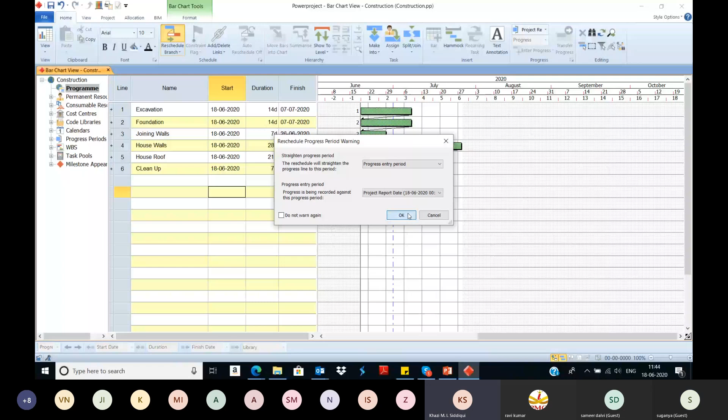Once you have given the relationships, you can go for the rescheduling. After giving the reschedule, all tasks are taking the finish to start relationships. Now I want to make this a summary task for all these tasks.

Created - construction of house. In the summary task, it will display the duration, start date, and finish date. So it has taken by default today's start date.

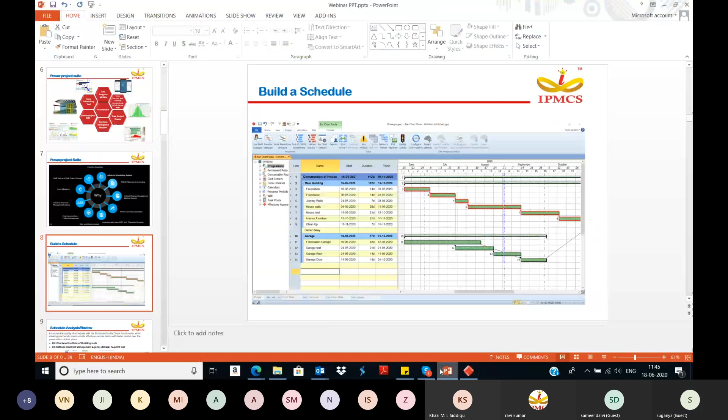The schedule has been built in Power Project. After building a schedule, we have to do the schedule analysis or review. So why do we need to do this? In order to cross-verify whether a schedule has been framed as per the logics and standards.

So based on which standard are we comparing whether our schedule is correct or not? We have two different methodologies: UK Chartered Institute of Building test, and US Defense Contract Management Agency DCMA 14-point test. In Power Project, these two tests are built in.

You can just run and check whether your schedule satisfies all the standards or not. You can see here in the diagram itself, and similarly we can check in Power Project.

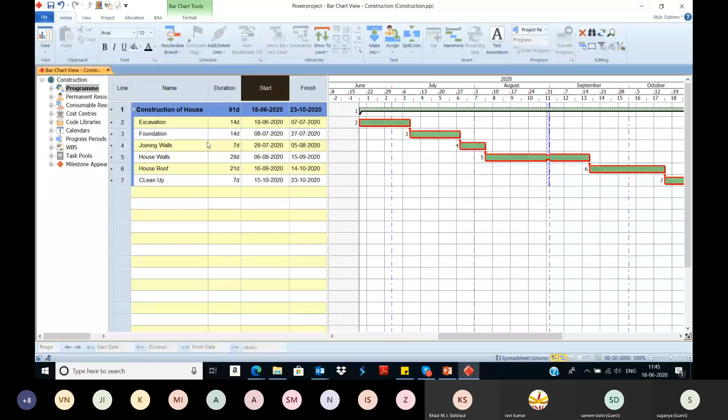You can go to the Project tab, here Quality Checks. You can choose which method you want. Right click, properties, select that you want to run for the whole project, then execute, so it will be generated.

Our schedule is proper in all ways, whereas other two things are like resources - we have not assigned any resources. It is just indicating this. So if you are doing resource management in real time, do it; otherwise, you don't need to do the resource management.

Also in a schedule, generally the predecessor and successor should be available for all tasks, whereas for the first activity the predecessor will not be available, and for the last activity the successor will not be available. This shows the closed network.

Also in a schedule, mixed relationships should be available, like finish-to-start or start-to-start together, whereas now I have used only finish-to-start, so it is indicating 66%. So in real time, you can check your schedule with this report.

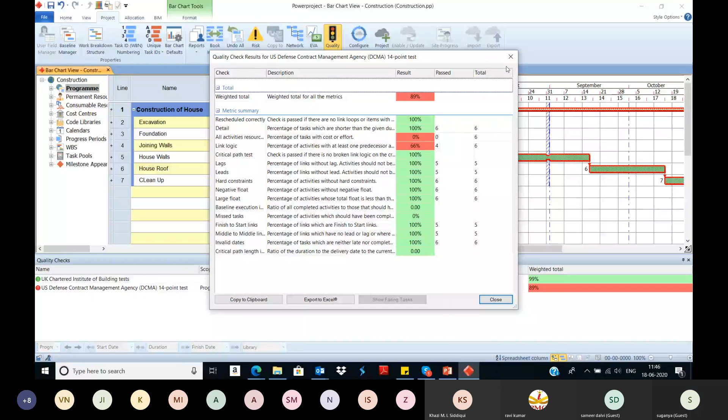After doing the schedule analysis or review, we'll move on to the baseline setup. Why do we need to do this? Once you frame the schedule, you send it to the client, and if the client agrees to complete the project in this much duration - the start and finish dates and cost - then you can freeze the plan for future comparison purposes.

So just go to Project, Baseline, New baseline, Finish. So the baseline has been displayed here.

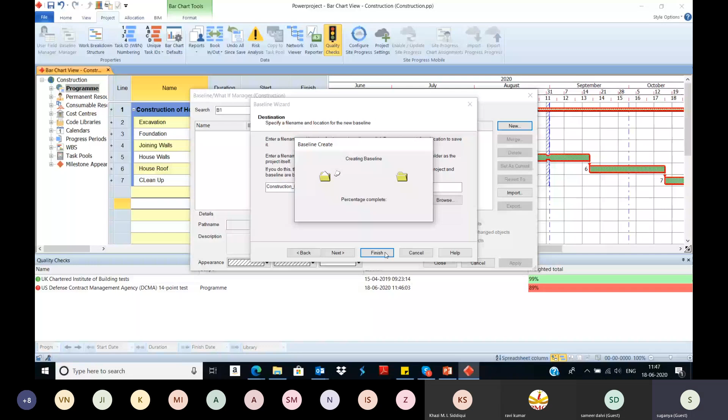After setting the baseline, the schedule has been frozen. We'll move on to the next step.

Overview of the delay analysis and its techniques. So what is a delay? Time during which some part of a construction project has remained incomplete or not performed as per contractual sections, key date, or completion date, due to unanticipated circumstances. So delays of activities which are on the critical path are the original delays which we are considering.

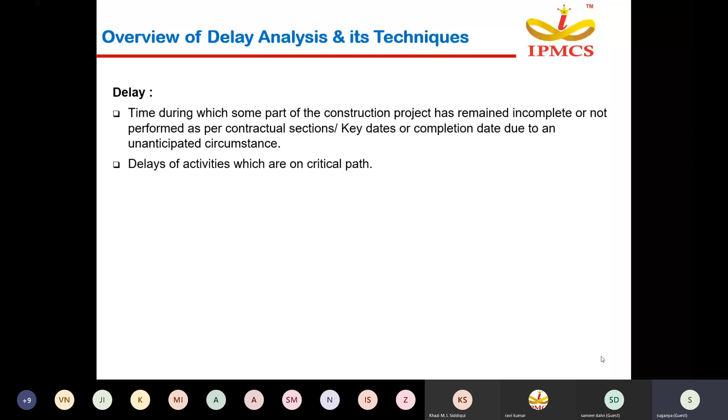Types of delays: there will be non-excusable delay, excusable delay, and concurrent delays. Under excusable, we have compensable and non-compensable delays.

So what is non-excusable delay? For non-excusable delay, there will not be any compensation in terms of cost or duration, whereas penalty charges are applicable for non-excusable delays. Some of the causes are defined here.

Difficulties in financing the project by the contractor, poor site management and supervision, ineffective planning and scheduling of the project, rework due to errors during construction, delays in subcontractor work, inadequate contractor experience, delay in site mobilization, delay in preparation of shop drawings and material samples.

So excusable delay types - we have two types: compensable and non-compensable. Compensable means in terms of time and cost - you can get cost compensation as well as extension of time. Whereas in non-compensable, you will not get cost compensation; only EOT is applicable for the non-compensable method.

So what is compensable? If an event within the owner's control could have been avoided by due care, the contractor is entitled to compensation for any loss suffered or expenses incurred. Whereas non-compensable: if the event is outside the owner's control, the contractor is not entitled to compensation for any loss suffered or expenses incurred - for example, force majeure, natural calamity, act of God, or judicial third party.

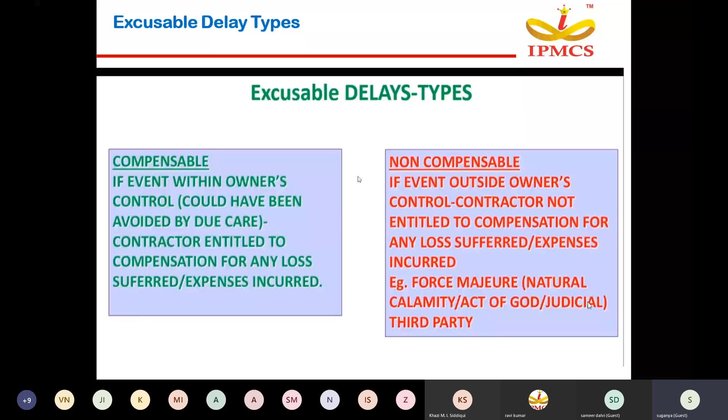Excusable compensable delays - some of the clauses for excusable compensable: slow decision making, suspension of work, late revisioning. These are all like from the client side if it happens - late in revising and approving design documents by the owner, delay to furnish and deliver the site to the contractor, delay in finance and payments of completed work by the owner, variation orders or changes of scope by the owner during construction.

Type of project, bidding and award, negotiation or lowest bidder, unrealistic contract duration forced by the client, ineffective delay penalties, owner interference.

Excusable non-compensable delay. Some clauses come under non-compensable delays: weather effect, hot, rain, etc., environmental restrictions, changes in government regulations and laws, slow permit by government or municipality, delay in performing final inspection and certification by a third party, lack of communication between the parties, fluctuation in cost or currency, force majeure such as war, revolution, riot, strike, and earthquake, etc.

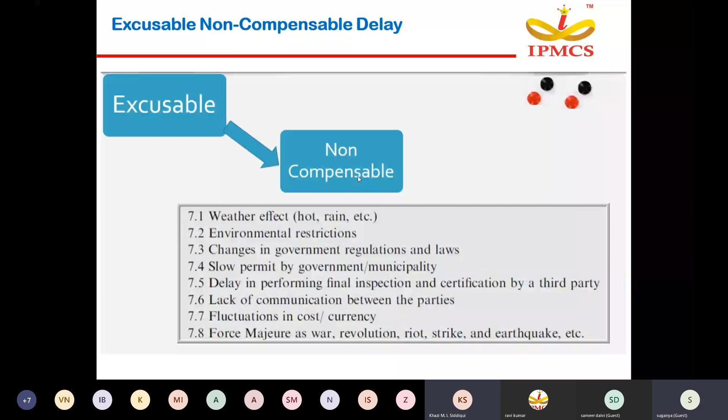The third method is concurrent delays. Concurrent delay is when excusable or non-excusable delays happen in parallel. Suppose two delays happen at the same time, that is called concurrent delay. For example, extreme weather is an excusable delay, while no resources is a non-excusable delay. Which one is feasible for us? We take the excusable delay duration and we can get compensation in terms of time and cost. So if concurrent delays happen, we ignore the non-excusable delay and take the excusable delay and highlight it to the client.

So how do we capture these delays in the schedule? For this, we follow one of the methods: time impact analysis or window analysis. Time impact analysis is a method used to determine the extent of impact from a potential delay in the construction process. The schedule analysis method involves the insertion or addition of activities indicating delays or changes into an updated schedule, representing progress up to the point when a delay event occurs, to determine the impact of those delay activities.

As discussed, this analysis applies to forecast the impact of potential delays in the project and the project's likely outcome. It involves insertion of delay activities indicating delays or changes in a schedule, representing progress up to the point when a delay event occurred. It helps promote negotiation and later agreements on delay claims. It is the best technique to determine the amount of extension of time that the contractor should have been granted at the time an excusable risk occurred. The final result of the time impact analysis must be presented shortly after completion by the contractor to avoid an additional EOT claim or construction acceleration.

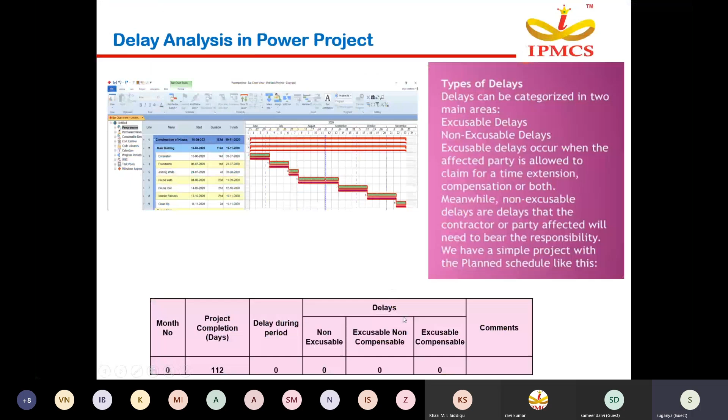So now you can check, 112 days duration is there, start and finish is there. In the slide you can see we have delayed 21 days on excavation due to unforeseen site condition. So initially this is our project, 112 days duration, whereas when we start updating in the first month, we are going to update our project on a monthly basis.

So in the initial stage itself, we agree with the client on which frequency we are going to update our project - monthly, weekly, fortnightly, or daily basis. Right now I have taken monthly basis updation. So at the end of the first month, whatever happened at the site, we have collected the information, and after collecting that I got to know there's a 21 day delay on excavation due to unforeseen site condition.

You can see here, 21 days unforeseen site condition delay activity is there. So I have to capture this delay activity in the schedule, then update the excavation. So now, go to Power Project.

Before starting the first activity itself, the first delay activity has occurred. So what you have to do to capture the delays is simply not change the activities - first capture the delay activities in the software. So, unforeseen site condition, 21 days duration.

After giving this, just link it. After completing this unforeseen site condition delay activity only, the excavation activity has been started. Just link it now.

Reschedule it. Also, when creating the activity, you can summarize and create it as a summary activity. So the unforeseen site condition is from the owner delay only, either owner delay or contractor delay.

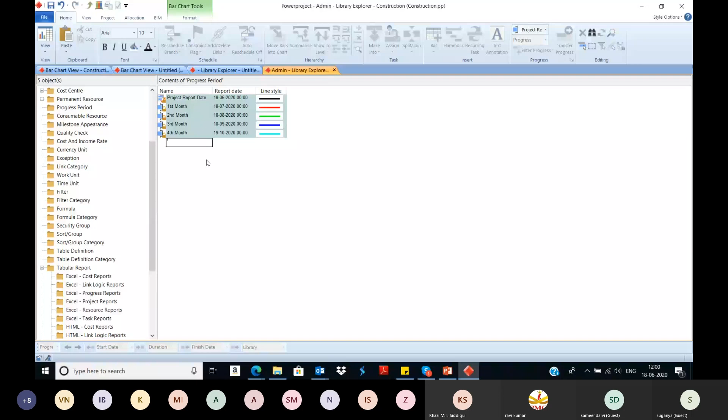Similarly, you can create third month, 18/9. Similarly, fourth month, 18/10. So I have created till the fourth month.

So now come to the project. Once you add the delay activity, now you can enter the actuals. So unforeseen site condition - I'm summarizing, putting this as the owner delay. Now you select the activity, right click in the bar chart itself, and go to enter progress.

You can choose the progress period. At the end of first month, this is 100% completed. And this activity, suppose this is completing on 16/7, means this activity will be starting on 17/7.

At the end of first month, .14 will be the percentage completion. Just enter and close it.

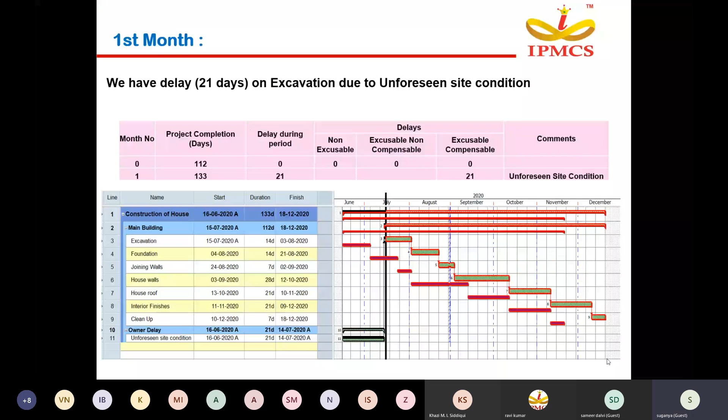So again we'll move on to the next month. First month, 21 days delay has been captured. Again in the second month, we have no delays. Just go to the project and update without delay in the second month.

You can select second month. Now you can select the next activity, enter progress for second month. So till this we have completed. Now again reschedule it for the second month. So second month has been rescheduled.

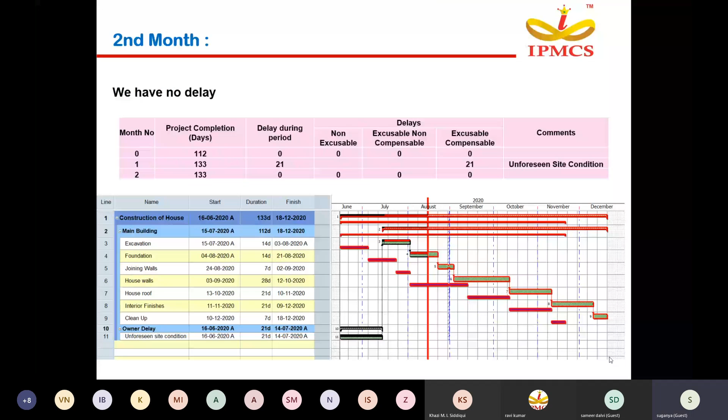Next, on third month, we have two different delays - one is owner delay and another is contractor delay. How you can capture this? So owner delay we have 14 days and then contractor delay we have 21 days.

So the subcontractor left the job. In this case, both are concurrent delays, two delays happening simultaneously. So what we will do - two delays happening simultaneously means 21 days, 14 days. So 14 days will come under the owner side, and the remaining 7 days only chargeable for the subcontractor, that is non-excusable. Let's see how to capture this.

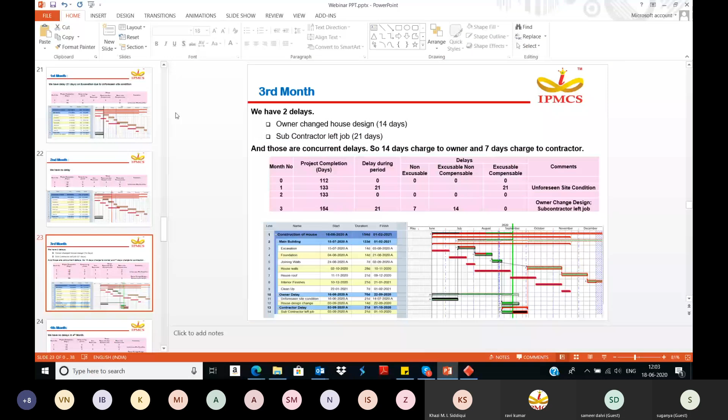So here you can add design change by owner - this activity will come under owner delay, so this is 14 days. Select this activity.

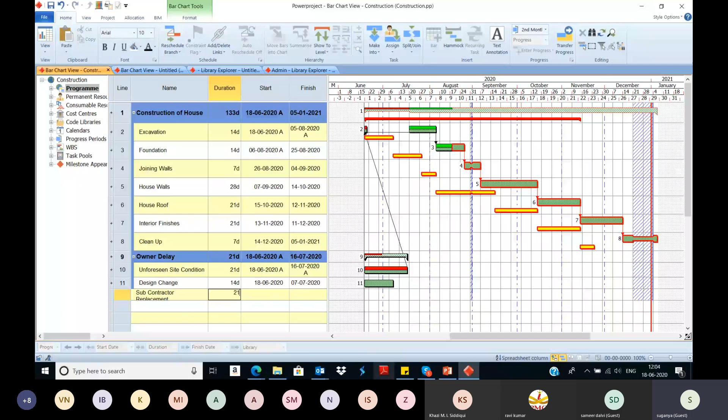Then again you can create one more - subcontractor left job, subcontractor replacement - this will come under 21 days. So now this activity will be added as a separate WBS, that is like contractor delay. You can summarize it and add it as a contractor delay.

So next you have to give the relationships, since these two are running parallelly - start to start.

Then you can see here - after the third activity completes, these two are starting. So give the relationships like that. Then after completing this one only, this activity is starting. So just give the reschedule.

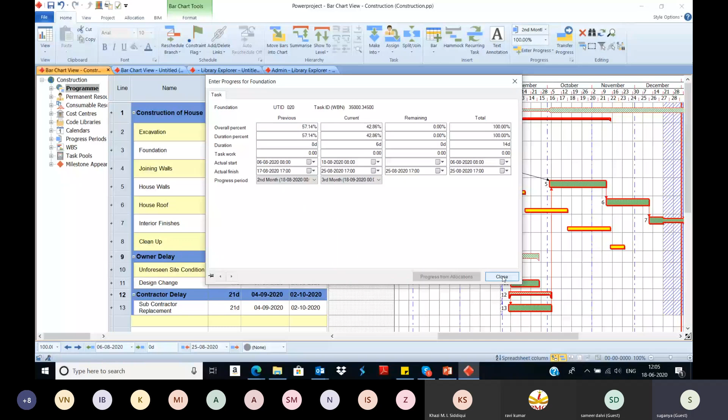So now you can start updating this. Select this, right click, enter progress up to third month. Next activity has also completed up to third month. Then these activities also you can give the completion - up to third month, these delays has occurred.

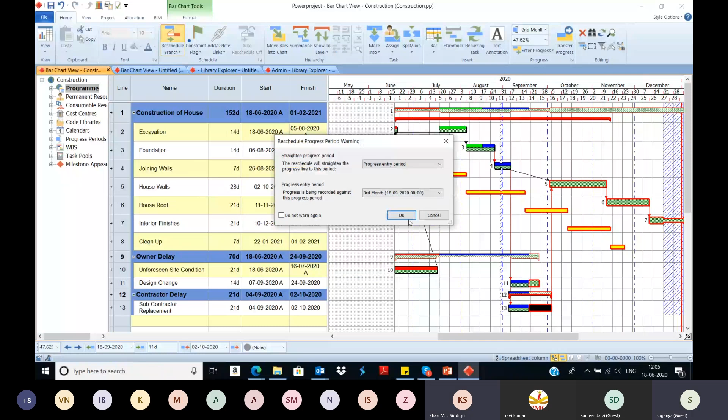So now you can reschedule it. After rescheduling, it has been changed to 152 days.

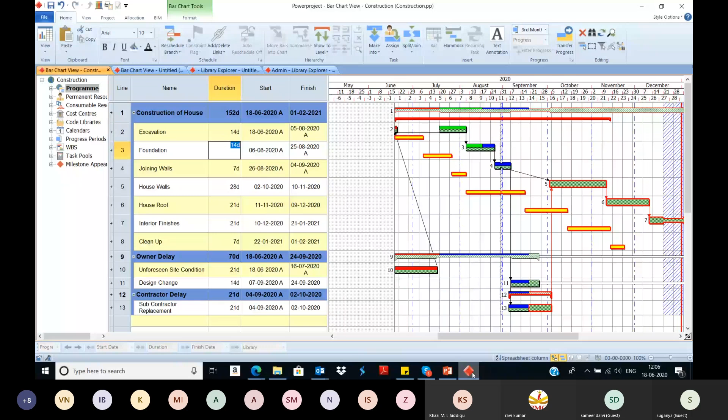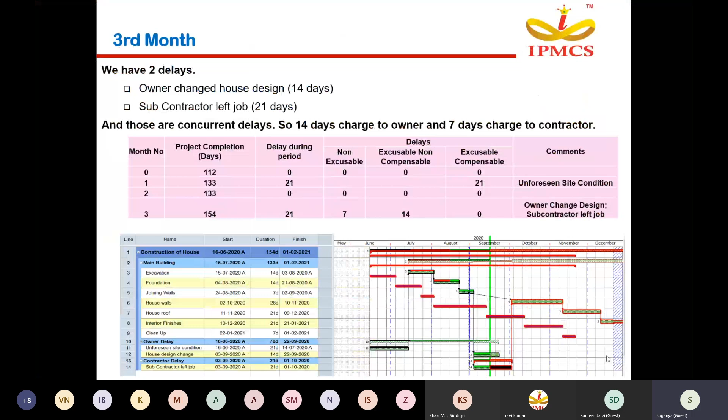Similarly, at the end of the third month we have 154 days. Then at the end of the fourth month, there are no delays. And at the end of the fifth, sixth, and seventh months, there are no delays.

Right now, whenever we are entering the delays, at the end of the first month we have entered 21 days, which is from the owner side, unforeseen site condition. Then in the third month, we have two delays: one is owner change design, and another is subcontractor left job.

The owner change design comes under excusable and non-compensable, where you cannot get any compensation, but you can get extension of time. Whereas subcontractor leaving, only 7 days will go as non-excusable.

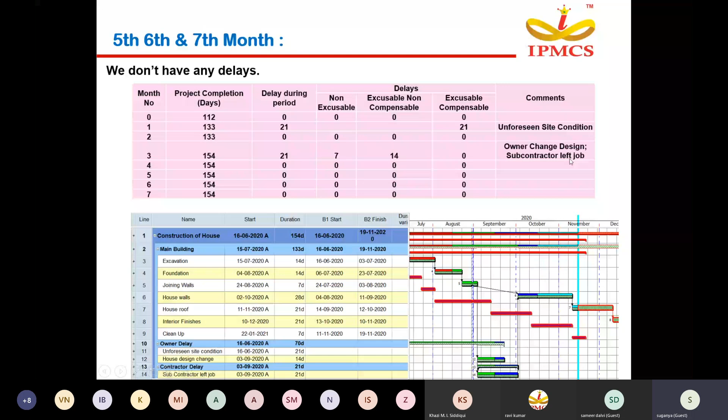Let's see the analysis of the project completion date. Overall, initially we planned to complete in 112 days, but it has been delayed by 21 days, making the project completion 133 days. Then again, 21 more days, making it 154 days total.

So if you take the total delay, it will be 42 days, whereas non-excusable is 7 days. In these 7 days, you will not get any time extension or compensation; instead you will be under penalty charge. Whereas excusable non-compensable is 14 days, for which you will get 14 days extension of time.

In excusable compensable, 21 days, you can get both extension of time and compensation. So you can see 21 days for time and cost, and 14 days for time only.

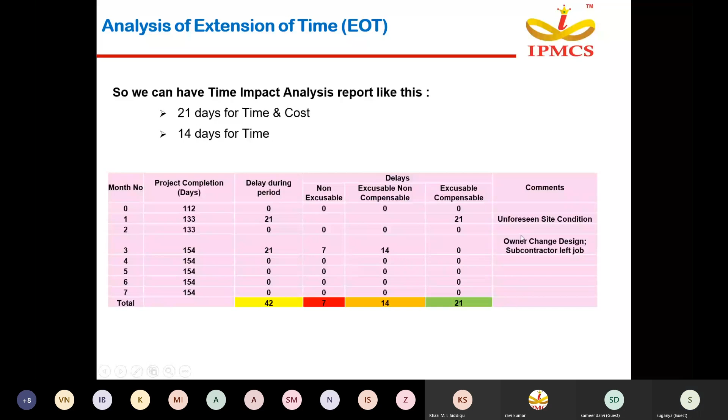This is how you get 154 days, and the duration variance and finish variance can be displayed here. Now the new start and finish dates have been generated. Initially, the baseline start is 16/6 and finish is 19/11, whereas now the current finish will be 2021, February 1st.

Now you can produce this as an extension of time schedule, or recovery schedule, to the client. In the recovery schedule, whatever delay happened, and the realistic, achievable plan, we produce it in the schedule and send it to the client to get the extension of time and compensation.

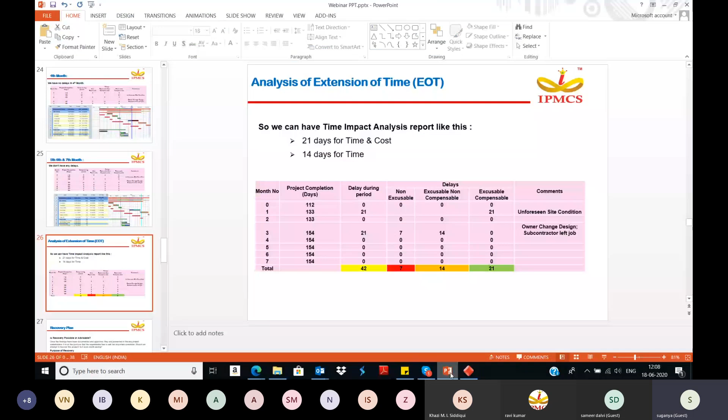Also, for the recovery plan, first we have to check in the schedule whether recovery is possible or advisable. Once the findings have been documented and approved, they are presented to the key project stakeholders.

At this point, the organization has to ask two important questions: Should we attempt to recover this project? Is it even worth saving?

The purpose of recovery is that the main goals are producing an achievable schedule, re-baselining the project plan, re-establishing customer and management confidence, sorting out project problems, and rebuilding the original project team.

Now we have gotten some extension of time, so a different finish date has been defined. After getting the different finish date, as a planning engineer or project manager, you can try different practices like schedule compression and fast tracking methods.

Still, if you want to compress the schedule, check whether it is achievable or not. If it is achievable, send it to the client and get approval.

So we have seen till now how to capture the delays and how to capture the recovery plans and extension of times in the Powerproject software. Hope everyone is clear. Now we'll see the other features of Powerproject.

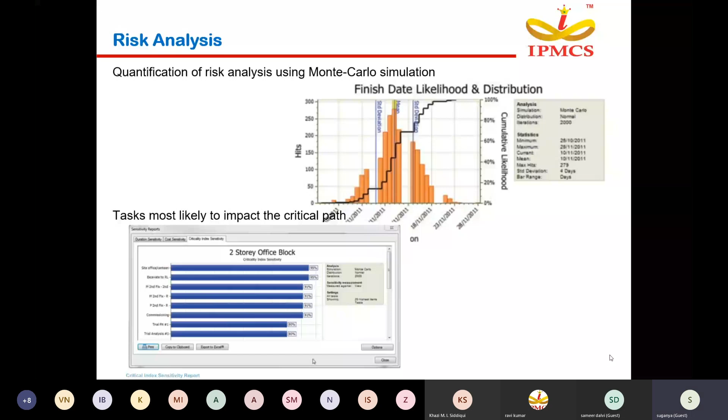Other features of Powerproject, like risk analysis. Inbuilt risk analysis is available in the Powerproject software. You can check what will be the extended finish date, and likelihood finish dates can be checked here.

You can go to the Project tab, go to Risk Analysis, and there you have an option called Schedule Check. The rescheduled report can be generated from the risk analysis itself. In your schedule, any constraints applied, any activity without a link, any open-ended activities, any out-of-sequence activities — all this information can be generated from schedule check, that is, the rescheduled report.

So number of tasks rescheduled, number of logical links, not started activities, started and completed activities — all this information can be generated from the rescheduled report. Also how many critical activities, which is the longest path, any deadlines, any open-ended activities.

Also, now you can run the risk analysis. I'm going to run the risk for all the projects, with the distribution setting as triangular, and you have two different sampling methods like Monte Carlo simulation and Latin hypercube. Whichever random sampling method you want, you can take. Now go to the task result and select generate.

So now we can get some finish date, like 1st February, I can complete from the schedule. But after you run the risk analysis, it is generating, there is 10% chance to complete the project on 28th January itself, but 100% chance to complete at the maximum 5th February 2021. So this is the advantage of the risk analysis.

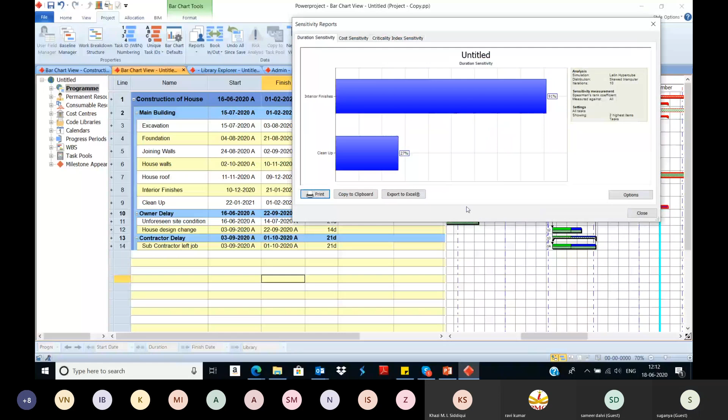So this risk report can be generated either in terms of sensitivity report or likelihood distribution. Go to sensitivity, graphical report can be generated, or the distribution method can be generated. So here it will show what are the chances to complete the project at the minimum 28th January, maximum 5th February, most likely to complete on 1st February.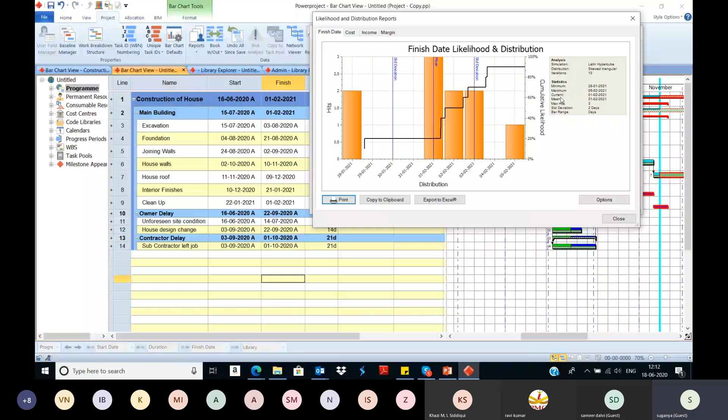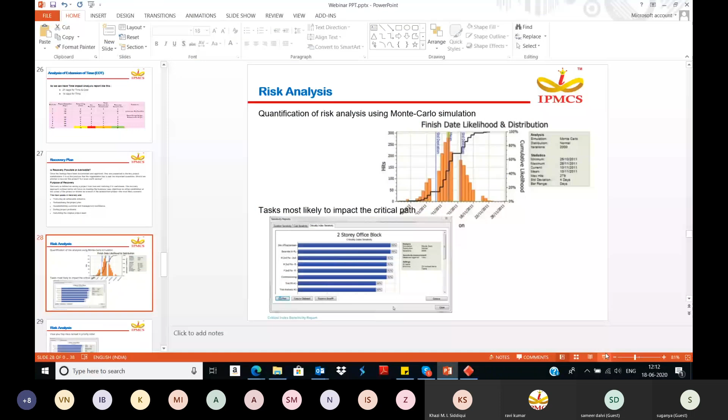So these are extra features of our project. Inbuilt, you can run the risk analysis. Reschedule report we have seen.

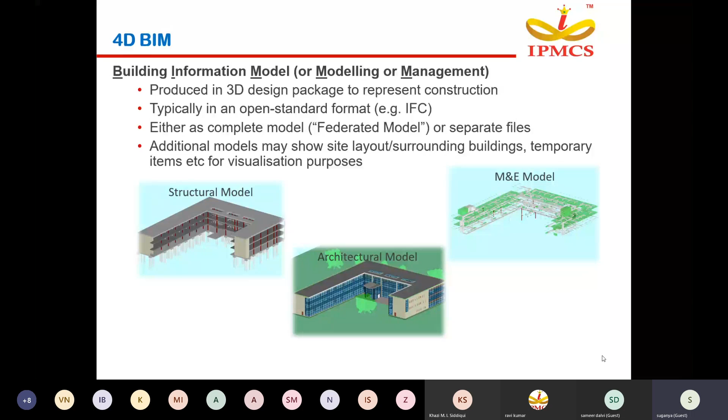So next, 4D BIM. In Power Project, you can access the 4D scheduling also. 4D BIM, Building Information Model or Modeling or Management, produced in a 3D design package to represent the construction activities, typically in an open standard format, IFC, either as a complete model or separate files. So additional models may show site layout or surrounding buildings, temporary items, etc. for visualization purposes. So in Power Project, you can bring the 3D models into Power Project, and then you can integrate the 3D model and the schedule to do the visualization, like 4D scheduling here.

The model simulation is possible in Power Project. Once you link the model and the activities, once you run the simulation, visual representation can be seen here on this particular date from the bar chart and the 3D model. On this particular date, which activity needs to start on site, whether it has been started or not. So you can capture the delay analysis in the model also in the visual representation.

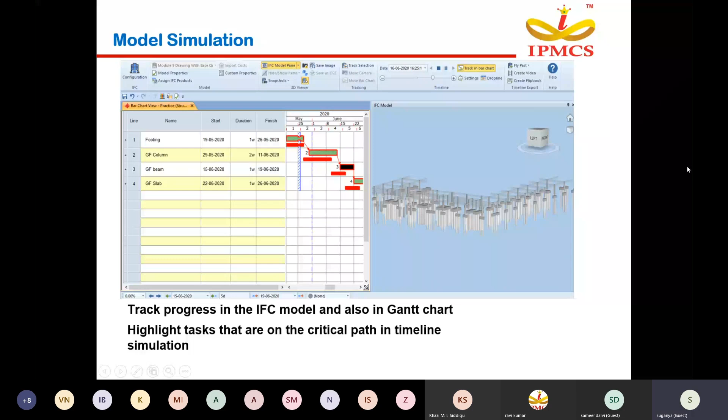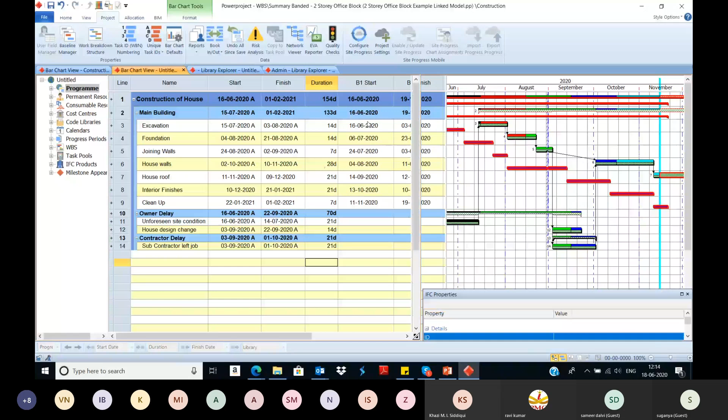So comparison of plan versus actuals can be seen in the 4D. So I'll just open and show you one sample project. The schedule as well as the 3D model is displaying here. So schedule activities have been linked with the 3D model here.

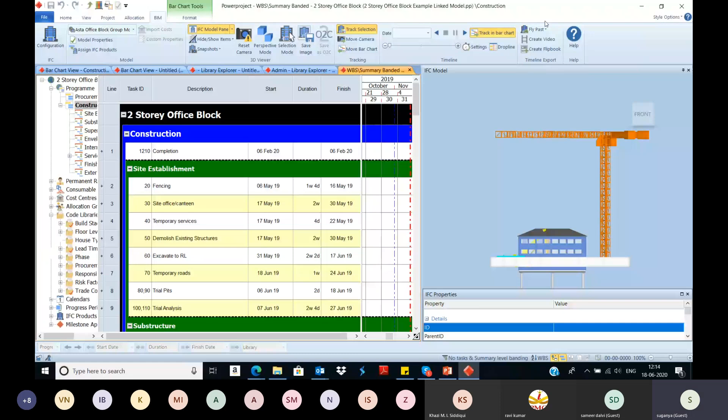You can just run the simulation and then you can check. So you can see here in the bar chart, it is highlighting in black color, so which activity is performing right now on the site. So you can change the simulation timings.

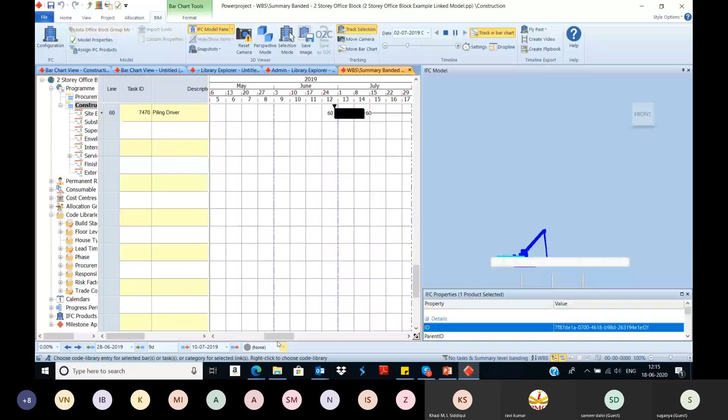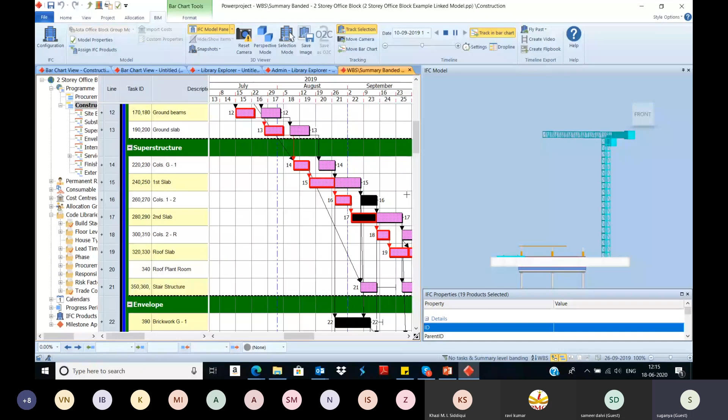So both the bar chart as well as the 3D model visualization can be represented here. Right now I'm showing only the plan and how the plan is building on the site. So when you are doing the actuals updation, the plan versus actual also can be seen here, as well as the delays also will be highlighted in the 3D model and you can see here.

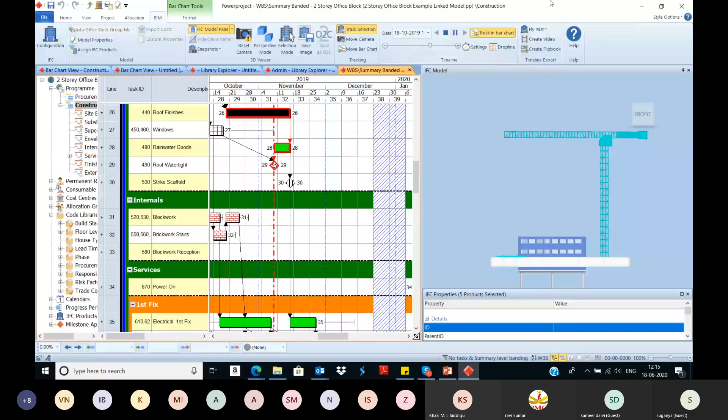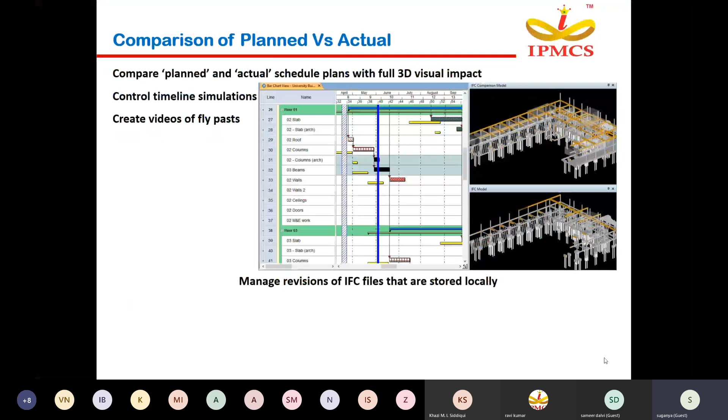So we have seen the 4D scheduling, how to do it in Power Project. Benefits of 4D planning: effective 4D planning tool, identify the problems that may not be visible via traditional schedules, run scenarios to assess feasibility of execution and find the best solution, see the impact on the 3D view as you update the Gantt chart, study how the build process will appear at different project stages, integrate as-built information.

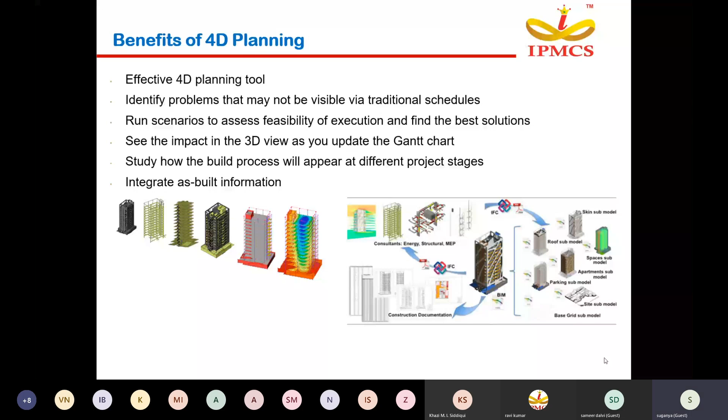Training services offered on the Power Project software: Power Project Basic, in which fundamentals of project management are covered, how to do a project from initial till closing, like Primavera and MSP. Power Project Advanced with 4D BIM. Power Project Enterprise, web-based enterprise solution. Role-based training offered for BIM managers, planning engineers, senior planning engineers, or project managers based on the particular roles or particular topics to be trained.

Corporate services: scheduler services, estimation and quantity surveyor services, implementation services, staff augmentation services, 4D and 5D BIM services on a short-term as well as long-term basis.